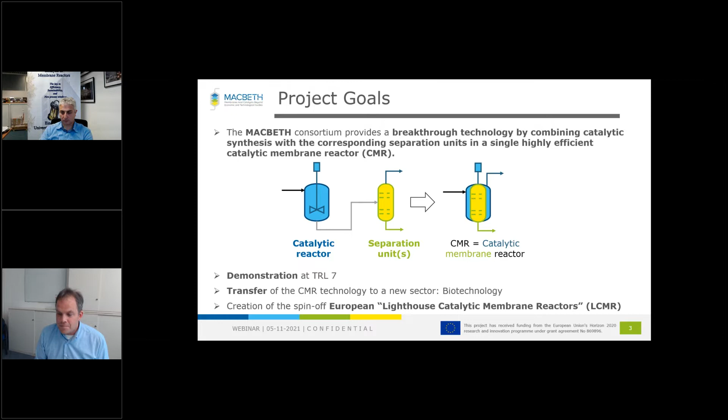If we go to the next slide, you'll see we don't start right from scratch, from the beginning. There's a lot of pre-work already done in predecessor projects.

Four of them you can see here. There's the Romeo project on one side, where large-scale chemical processes were looked at, water gas shift reaction and hydroformylation. Out of that project, we take the hydroformylation as a very promising use case that you will see later on, and to demonstrate the membrane reactor technology in a 2-in-1 reactor.

Bionico was the second European funded project aiming on the hydrogen production and separation in a membrane reactor itself, focusing on the biogas production. So this demonstration case will be elaborated within MACBETH as well, and on top of that, even a second showcase for the hydrogen case.

From the CARENA project, there were promising results in the conversion of light alkanes and CO2 into higher value chemicals that we will look at for the propane dehydrogenation case.

And finally, there's the Cosmos project, a predecessor project aiming on the biocatalytical oil cleavage, where the bases were laid in terms of highly selective enzyme technologies. And the task is really to combine these base findings for the biocatalytical oil cleavages and bring it now into the thinking of the membrane reactor technology. So really a great basis that we could start off.

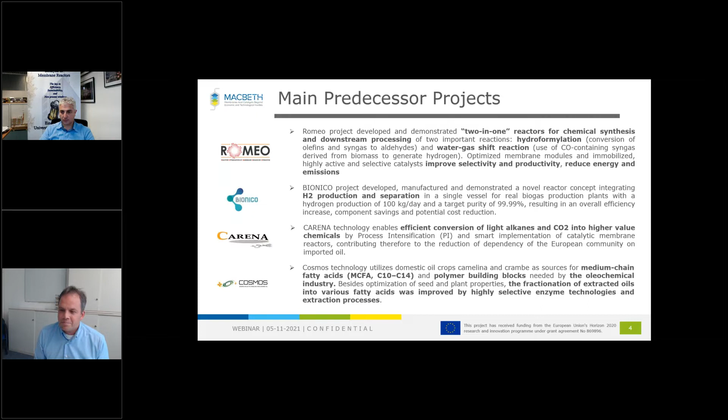Thank you very much, Frank. I'm Fausto Gallucci from Eindhoven University. And as you saw, we have quite a big project, and we want to demonstrate at TRL 7, 4 technologies. Frank already mentioned that for the hydrogen production, we have a second demonstrator. So in total, we have 5 demonstrations at TRL 7.

And how we put and set up the project together is realizing that the different teams have a single point in common, which is the integration of reaction and separation in membrane reactors. And to do that, you have building blocks, which are the supports for catalysts and membranes, the membranes themselves, and the catalyst to be integrated.

So what we do is we start from what we achieved in the different project at TRL 5, what we call building blocks. We scale up the building blocks, we integrate in membrane reactors, and finally we do the demonstration.

And as we also said before, one of the output of this project will be also the creation of lighthouse membrane reactors, where we collectively put together all the knowledge and we offer the knowledge to other partners that want to test membrane reactors, so membranes and reactors for their application. So in this way, we thought that we can accelerate the exploitation of the membrane reactors for other type of reactions.

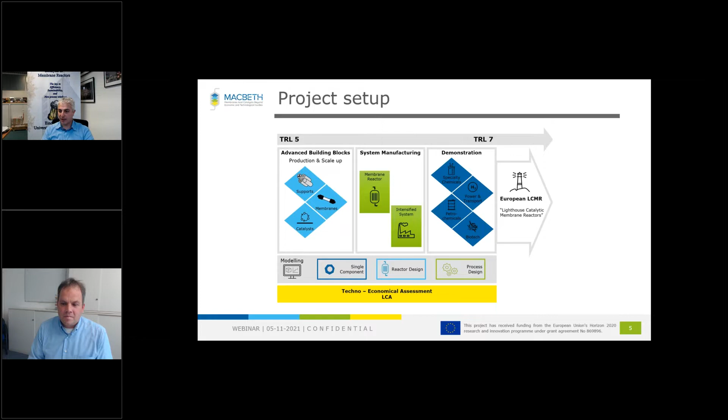Now, the project is quite big. It's 24 partners in 10 countries. And I'm also happy to say that soon will be 25 and next year will be 26 partners. So as an experience in European project, I'm very happy that this is the project where partners start to join the project rather than leaving the project.

And we have from Germany, Italy, Spain, the Netherlands, Belgium, and France, UK, and Turkey as well. So you see that this is quite diverse.

And we have 5 prototypes, and here you see where the prototypes will be tested for TRL 7. We have 4 cases. One is the hydrogen, the hydroformylation, propane dehydrogenation, and the BOC case. And today you will see a presentation, a short presentation of all the cases, 15 minutes per presentation, and then afterwards we have time for discussion.

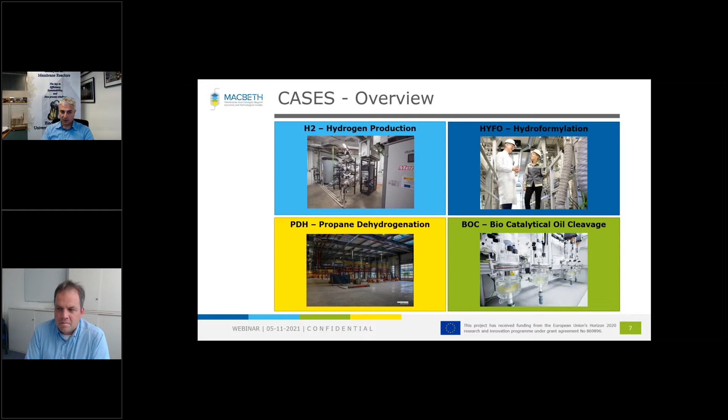And the agenda of today will be basically after this short introduction, we will start with the hydroformylation, and then I will continue with the hydrogen production, and then we go on. And at the end, we have 20 minutes for hopefully your questions.

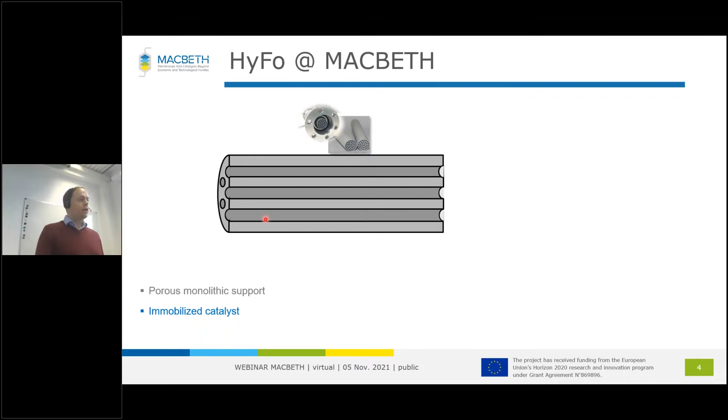What we are doing now is we are changing the system from a homogeneous into a heterogeneous one. To do so, we are using monolith structures to support the catalyst material. And what we're doing additionally, we are wrapping a membrane on the outer wall of the monolith system.

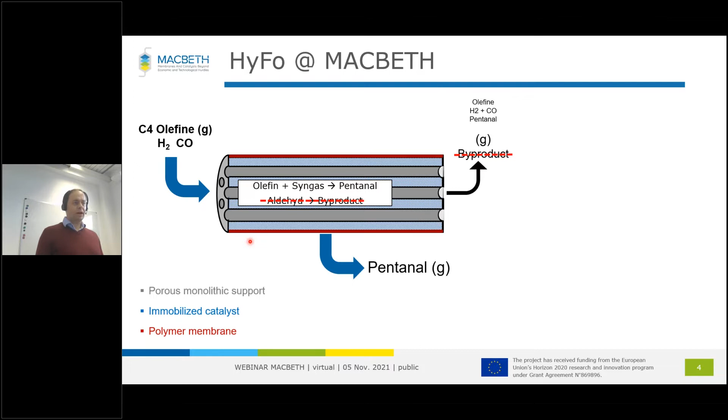We are doing the same chemistry, so we are inserting olefin, hydrogen, and CO into it. We are still converting it to pentanal, but now there's an interplay between the reactor and the membrane. The membrane works as a separation unit, but it affects the reactor, the reaction, and the whole process in a tremendous way, with a highlight in the focus of sustainability.

Because it clearly simplifies your process - by putting two things into one process unit, you have the advantage that you can remove your product just in time, preventing side reactions like the formation of byproducts. With this, you increase the selectivity of the process. On the other hand, in a typical fixed bed reactor, your pentanal will act as a diluent in the bottom part, but by removing it as soon as possible, you can intensify the whole process.

And if you apply this technology, you're clearly saving carbon dioxide emissions. And because you integrate a big part of your downstream in one unit, you increase also the energy efficiency.

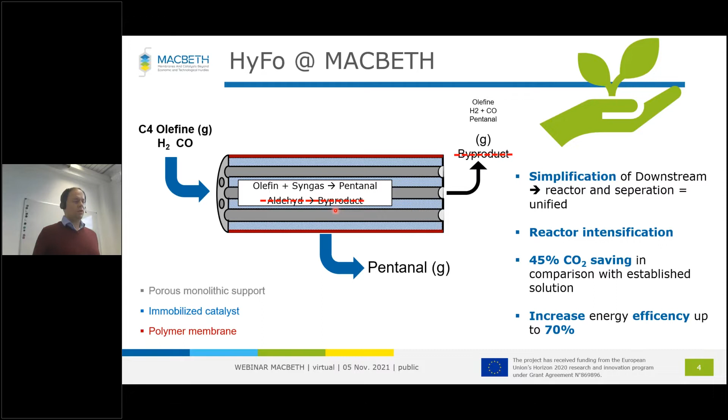So now you have a nice sketch about how it works, but how is it realized? This is sketched here. So here is our monolith, and this monolith is a porous ceramic made of silicon carbide - a really tough material. This material is completely porous with an open pore network, so that all your reactants can be transported into every channel all the time.

And in this channel, you can see here, the pore structure includes another material, an SiO2 layer, which is stored in those pores. But the pores are still open, so that you have again complete transport to the whole system. And finally, at the outside of this monolith, we have a supported skin material, which is there to keep the membrane, which is a polymer, in place.

Because of such large pores, if you would just add a polymer simply to this ceramic, your membrane would not stick as long as required. The skin is just a small layer of additional silicon carbide material, which provides another pore texture, and for this reason your membrane keeps in position.

So now I've shown how the monolith is constructed, but where's the catalyst? How do you do that? For industry application, it obviously requires a very simple system to do so, to be applicable. This is sketched here.

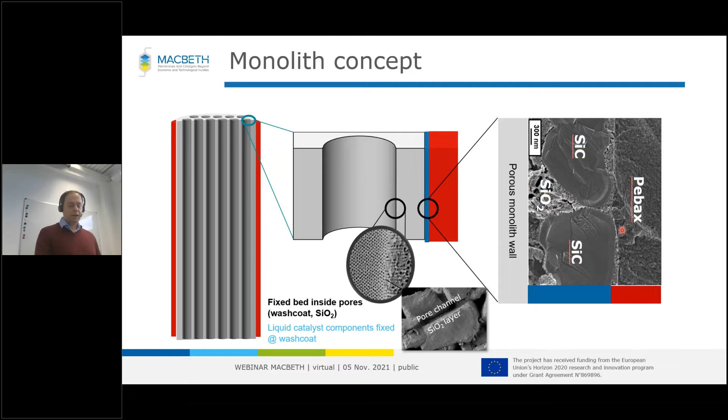So to introduce the catalyst to the reactor, we have a so-called coating procedure. It requires a solvent which can easily evaporate, and in this solvent, you put in your classical materials - the rhodium precursor, the ligand, and the stabilizer. What you can do in parallel is just mount the monolith to the setup, and then you can introduce your coating solution to the reactor, filling everything - this means the monolith inside and the pores.

This happens at ambient pressure and room temperature, so it's not very sophisticated anymore. It's applicable even on a larger scale. After waiting half an hour, you can release your coating solution, and then your monolith is ready to perform. You just have to evaporate your solvent and increase the temperature, and then the system is ready to operate, so you can increase pressure and temperature, feed your reaction feed into the system, and the monolith works.

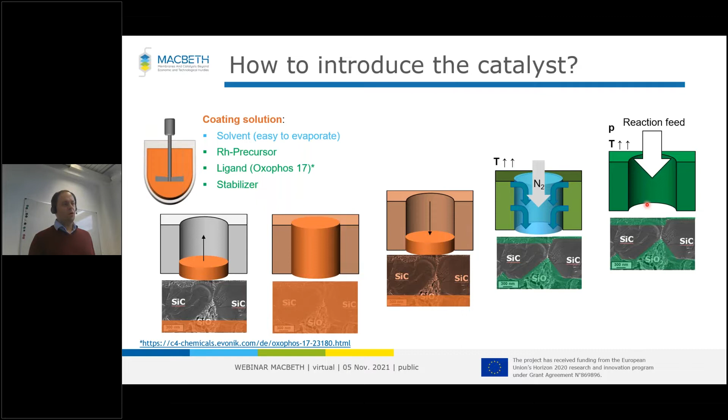To get to this status obviously requires a great team with several experts to improve, optimize, and even develop it. Here is an overview.

LiqTech and CSIC take care of the monolith, the wash coat, and the skin. Hereon provides the membrane and all the experiments on how to put this membrane to the wall so we can mount it on big setups. DTU takes care of the whole coating process and coating optimization strategies. FAU takes care of testing the system, because we have a complex interplay even if it looks very simple. And we as Evonik are doing upscaling experiments, long time experiments, and we are also highly interested in modeling this whole system, because the interplays are still complex, but they work.

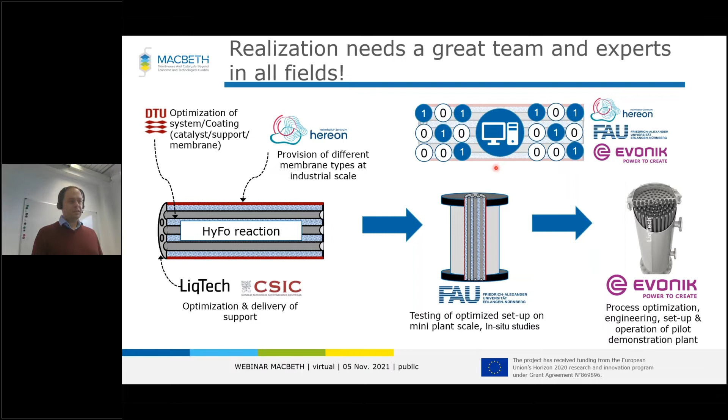So what is the status for today? We are right here on the left-hand side of this picture. We are still using lab setups at a scale where we can operate the system for more than 1,000 hours and beyond. Our next step will be to move into the field to construct a pilot plant, which will have a clearly bigger dimension than we have here in this lab.

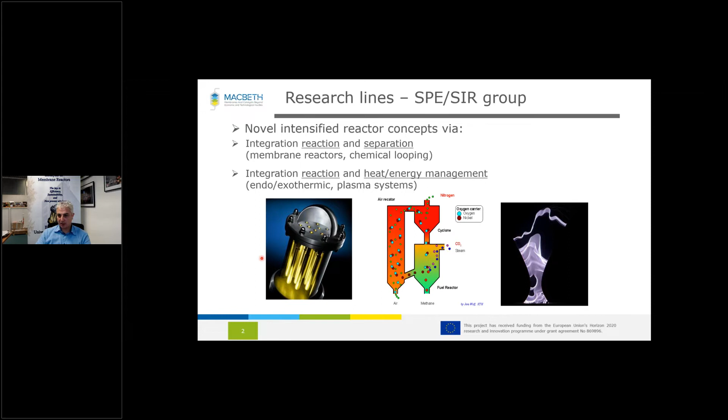For hydrogen, what we mentioned before is that we started from the results of Bionico. Here you see the reason why we use a membrane reactor. If you start from biogas or natural gas, you can produce hydrogen through a number of steps which are all equilibrium reactions producing hydrogen, but they work at different temperatures.

So reforming is high temperature, and then you have lower temperature water gas shift, and finally purification. On the other hand, if you integrate the separation of hydrogen into the reactor, you can basically combine all the steps into a single one, which helps decrease the capex, but you can also decrease the temperature because you shift the equilibrium, and this helps increase efficiency.

In MACBETH, we started from Bionico, where we designed a reactor for biogas conversion, and we want to demonstrate two prototypes for two different technologies: one is autothermal reforming of biogas, the other is steam reforming of natural gas. The reason we want to do two is that they share many common themes.

The catalysts and membranes are shared, but the architecture is a little different. In one case it's more compact but less efficient. In the other case it's a bit more involved because you have recycles, but it's also more efficient. We work with palladium membranes because this way you have much higher selectivity and can get pure hydrogen in one step without cleaning afterwards.

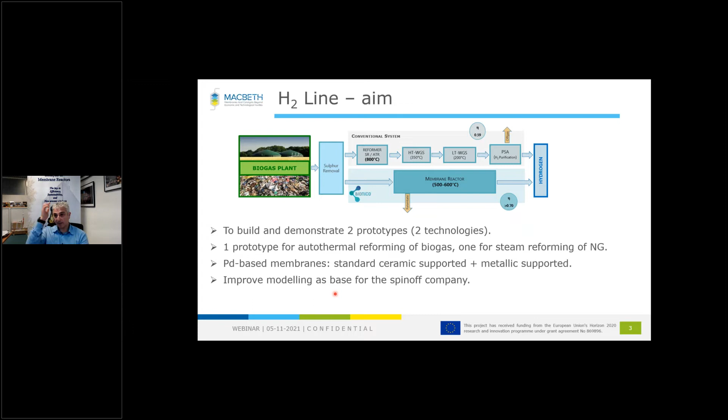We also try to improve the modeling and all the knowledge on membrane reactors to move toward a spin-off company that will be part of MACBETH. As I mentioned, for the different lines we have something in common: the catalyst, the membrane, the support, and the reactors. What does this mean for hydrogen?

For hydrogen, the goal for the catalyst is to optimize the amount of catalyst compared to the amount of hydrogen we want to produce. In the past, till Bionico, we played it safe, just putting enough catalyst to always be at equilibrium. But now that we're closer to commercialization, we have to really optimize the catalyst, especially because in the last 2 years the cost of materials, including the active material for our catalyst, has increased quite a lot. So we have to optimize that.

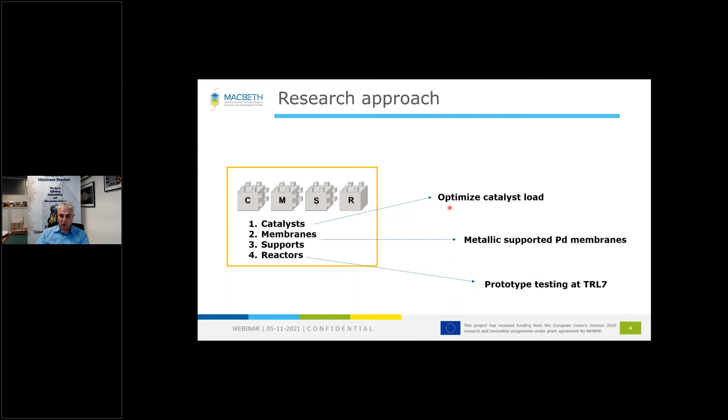For the membranes, what we are working on especially is metallic supported membranes, including the support. The reason is that with metallic supported membranes, the sealing is much cheaper and the selectivity is much higher. On the other hand, the cost of the actual support is too high, so we are working on reducing the cost. And of course, the reactor involves testing the prototypes at TRL 7. I'll show a few results on all of these points.

The first is the catalyst. What we did in Bionico, or till Bionico, is develop a fluidized bed catalyst. We use a fluidized bed because the membranes are very selective with high flux, so to avoid any mass and heat transfer limitation, we work with a fluidized bed. But in Bionico, we just had so much catalyst that there was no problem in conversion. Now what we want to do is really reduce the amount of catalyst to the optimal amount.

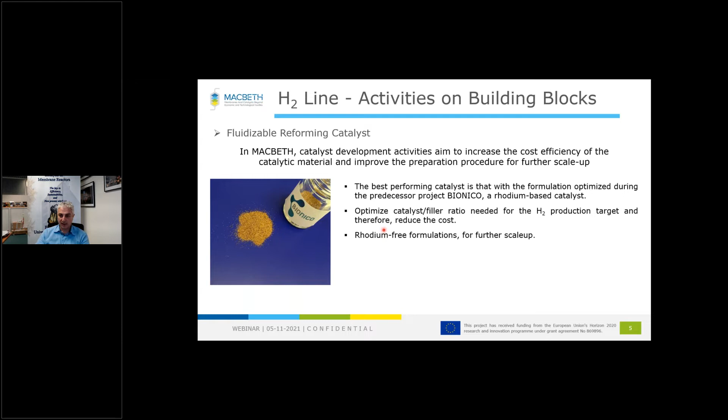I want to show you a few modeling and experimental results. The blue points are the experimental results done by Johnson Matthey, which is producing our catalyst. You see that in principle we can get very good results with our model if we use the right model for the right catalyst.

In the case we use nickel catalyst, which has a much lower productivity as you see here, if we put enough nickel catalyst and enough rhodium catalyst, basically there's no difference. The reactor will produce the amount of hydrogen and will just be limited by the hydrogen that you remove from the reactor itself. But if we reduce the amount of catalyst, you see that with rhodium we can go to 10% or even lower than 10% and still produce the amount of hydrogen we want. While with nickel, at a certain point we start to be limited by kinetics.

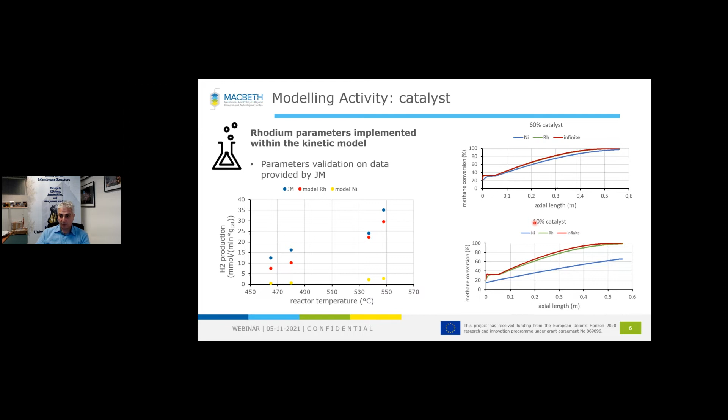Since we're working with rhodium, it makes sense to go very low in the amount of catalyst needed for hydrogen production. We then used this model to map the operation of the reactor as a function of temperature, amount of hydrogen produced, and amount of catalyst. For our catalyst, as soon as we reach around 10%, there's basically no difference in the performance of the reactor at any temperature.

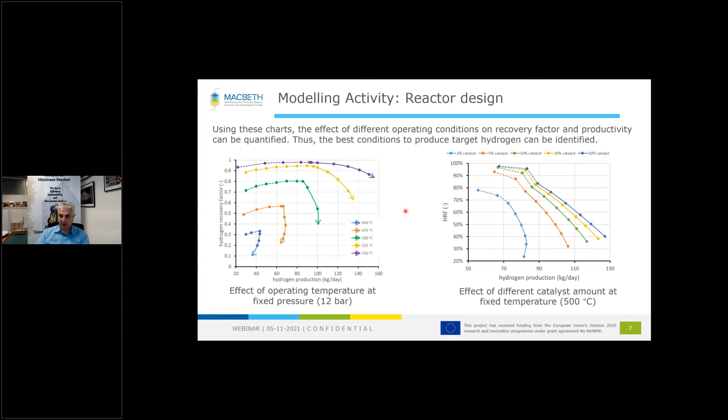Now, for the metallic support, as I said before, we are able to produce metallic supported membranes. There are different people able to produce metallic supported membranes, but if you want to do a large-scale membrane reactor, the cost of the support is too high, especially because there's only one company that produces support with the quality needed for our membrane. So what we do in MACBETH is start from relatively cheap support, actually Hastelloy filters.

You cannot simply put the palladium on top of it. What we do is modify the surface of the support. Then we put a coating of ceramic to avoid any interdiffusion movement of metal, and finally we put the palladium on top of it.

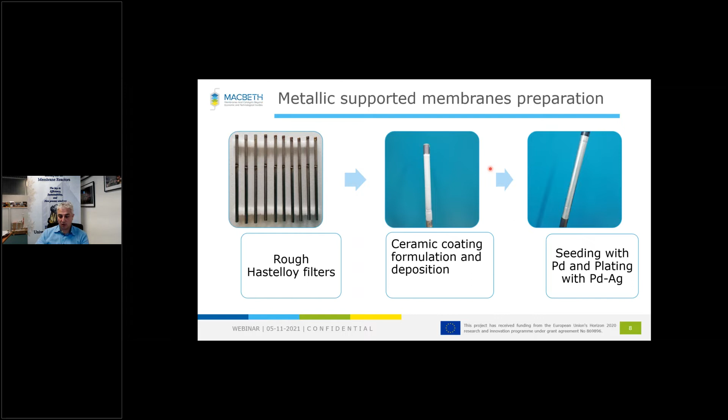I want to show a few tests that we did in the lab. You see that basically you can modify and polish the surface. As a function of time, your surface gets more and more polished, more and more smooth, as you see here. This is the original support, then 3 hours, 6 hours, 9 hours - you get an increasingly smooth surface. On the other hand, you are also covering some of the pores.

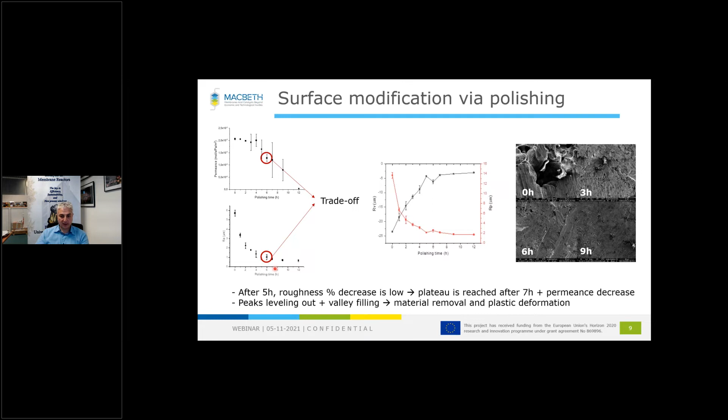The permeation through the support decreases, so we found out there is a trade-off, and this trade-off is around 4 to 6 hours, where you can have the good quality needed to produce the membranes. Here you see a few membranes that we produced - this is a first plating and then a replating, giving relatively good membranes. You see that we are able to do either 4 to 10 micron membranes.

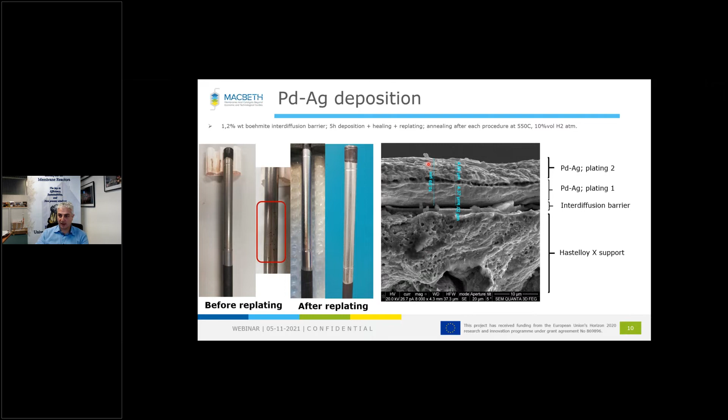You can see also here the interdiffusion barrier. Where we are now is that we know how to modify the support, but the layer is not as good as we need for the reactor. And you see here that there is a little bit of leakage still, and this is because the polished support has still some big pores, and we are now optimizing how to cover these big pores. So at the moment, the ideal selectivity is below 1,000, and for the project we should go above 20,000.

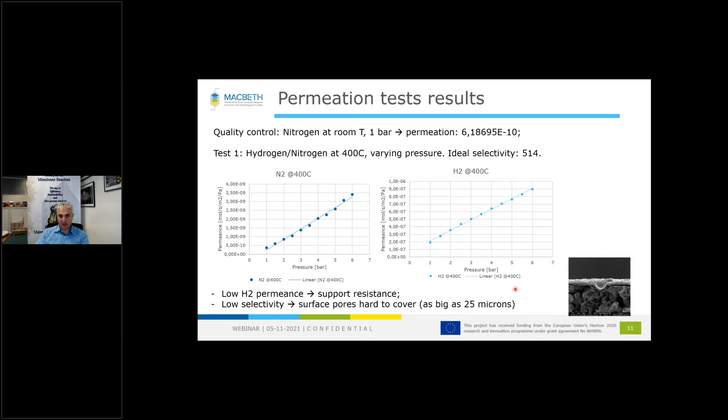The next step is the demonstration. We have two demonstrations, I show here only a picture of one. We went through the design, modeling design, HAZOP, and you see here a scheme during the HAZOP, and here you see the real prototype.

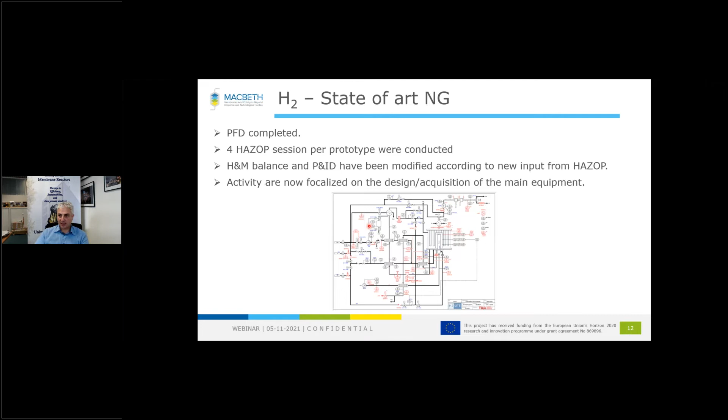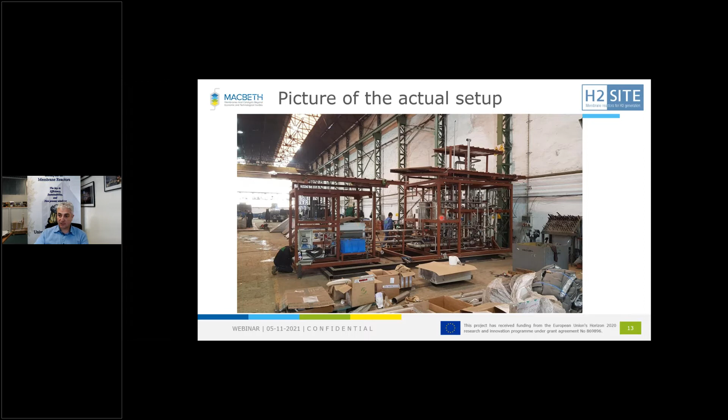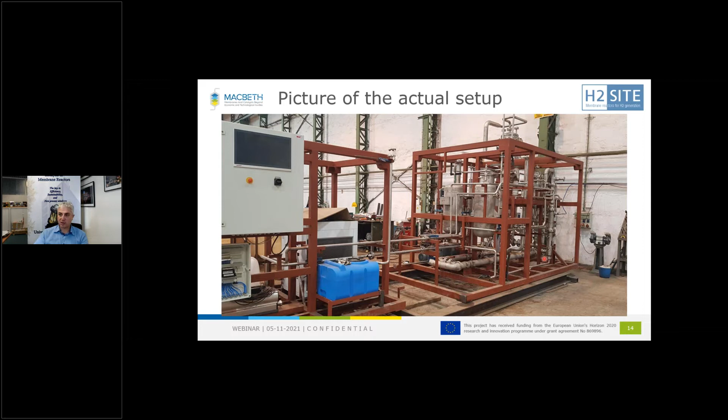For the hydrogen, we are a little bit ahead compared to the other lines. Prototypes already being assembled, you see a lot of parts here, and here another picture of the prototype. This is a 20 cubic meter prototype. It's still quite empty because it's still a research prototype, but it's smaller than a container. This is now being transported for the final connection and the FAT, and then we will be able to test this reactor, hopefully next year.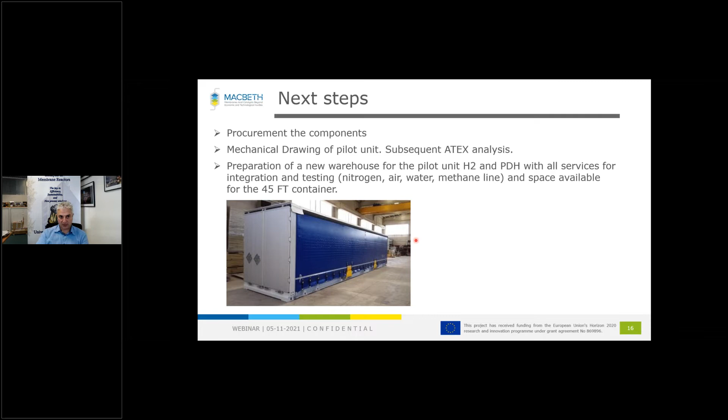To finish, what we are doing now is to further optimize the amount of catalyst, scale up the membrane production until we can produce all the membranes, hopefully next year for the prototype, and finalize the two prototypes. One is almost finalized, the other is a little bit behind, but we are confident that also the second one will be finished by next year.

The main challenge we see at the moment is that the supply of components is not straightforward, because those components are too large for lab scale and too small for larger scale. So we are in between, and it's very complicated to get the right components. But still, we are confident that both prototypes will be finished well in time for the demonstration. Thank you very much, and I will hand over the word again.

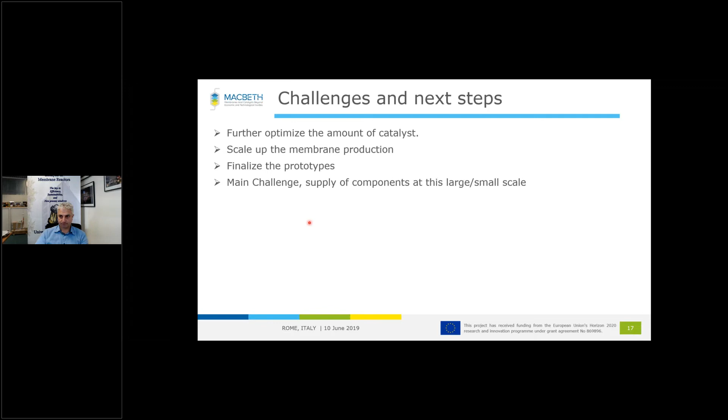Okay, can you see my screen? Yes. Okay, good afternoon to all. Okay, so I'm Vittoria Cosentino from KT, and today I will illustrate the PDH line for the MACBETH project.

In this presentation we will see some information about propylene with a focus on thermodynamic and kinetics aspects. We will then talk about the background of the PDH membrane-based technology, to analyze what led us to the definition of the MACBETH objectives and the new innovative PDH line, and conclude with a brief focus on the status of the activities.

While we are talking about propylene, the propylene market today is very varied, as propylene is the basis of many commonly used products, mostly plastics and adhesives. In the graph you can see a breakdown of the market, where the majority of production is towards polypropylene. Currently, propylene is produced as a byproduct of ethylene, in processes such as steam cracking and fluid catalytic cracking.

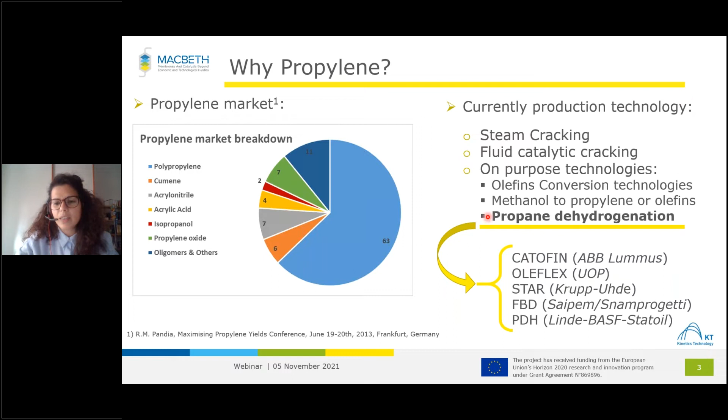But today, on-purpose technologies are becoming more popular, since the demand of propylene is widely increasing, while the demand of ethylene is decreasing. So the main on-purpose technologies are olefin conversion, methanol to propylene or olefin, and propane dehydrogenation. Among the latest commercial technologies are CATOFIN, Oleflex, STAR, FBD, and PDH. All of these technologies are based on propane dehydrogenation.

In blue you can see the reaction, and as you can see, this reaction is strongly endothermic, so it's favored at high temperature, and occurs with an increase in moles, so it's also favored at low pressure. Industrially, the operating conditions are temperature between 560 and 650 degrees C, and pressure up to 5 bar.

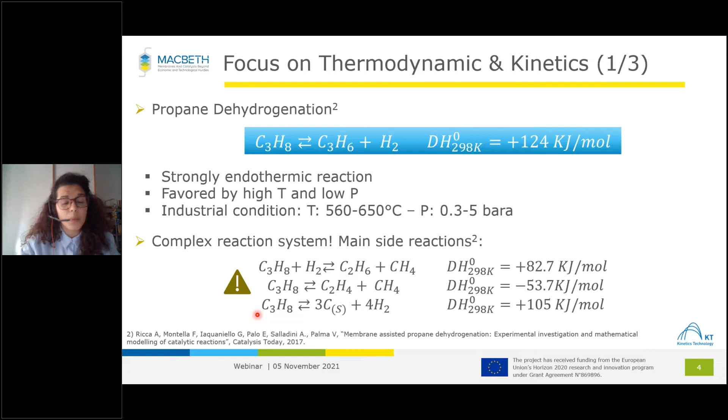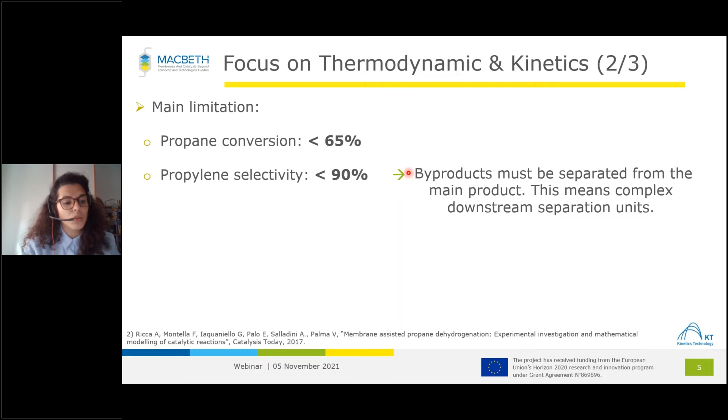The reaction system is very complex; these are the main side reactions which occur in parallel with the dehydrogenation, and propylene is not the most favored product. So we need a catalyst to favor the propane conversion and the propylene selectivity. However, even with a catalyst, the propane conversion is quite low, and the selectivity of propylene doesn't exceed 90% in the most optimistic case. So we have lots of byproducts which should be separated, and the downstream separation unit is very complex.

The main problem is the coke formation, because the coke can deactivate the catalyst sites and lead to different problems during operation of the reactor. The reaction is endothermic, so it's favored at high temperature, but coke is also favored at high temperature.

This means we need to operate at lower temperature, which further reduces the propane conversion, and above all, we need to regenerate the catalyst during operation. So indeed, the commercialized technology has a complex system of reaction-regeneration schemes. So what would be a solution?

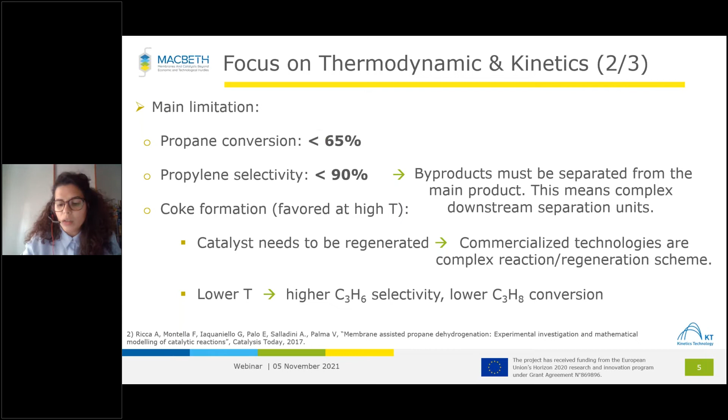A solution could be introducing inside the reactor hydrogen perm-selectivity membranes. Removing the hydrogen allows shifting the chemical equilibrium towards products, thanks to Le Chatelier's principle, enhancing the propylene yield at lower temperature. We also have other advantages: use of low-grade heat rejected by downstream process, reduced catalyst regeneration step, potentially reduced conventional plant capacity, and valorization of the side stream.

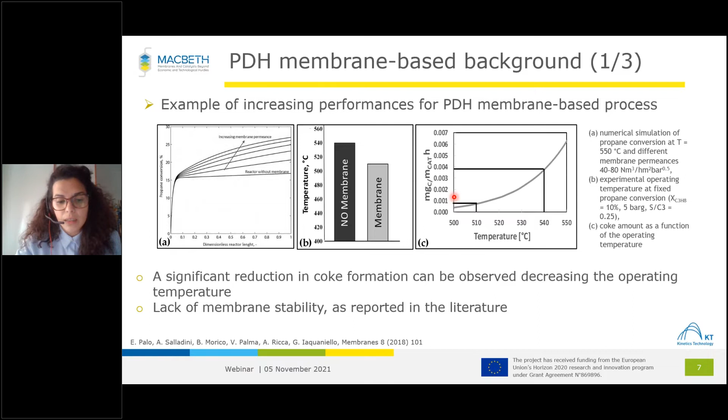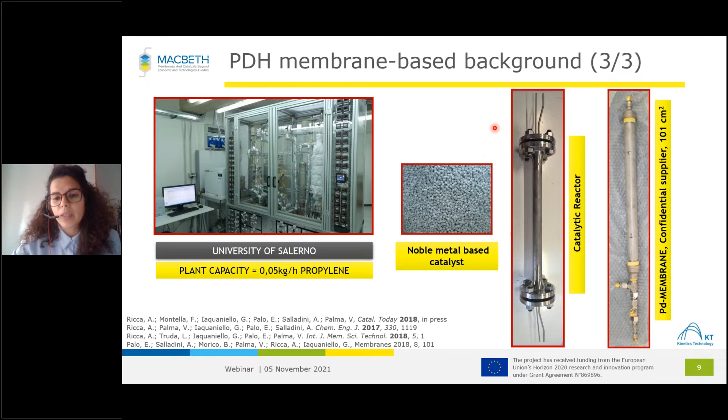In these slides, there are some pictures of the previous PDH membrane-based project: this is the pilot plant, and then we have pictures of the catalytic reactor and the membrane module.

Starting from these previous results, the aim of the MACBETH project is to bring the PDH line to TRL7. The main objectives are to operate the plant at mild operating conditions, below 540 degrees C, in order to reduce coke formation and thereby reduce catalyst deactivation, increase propylene selectivity, and have a stable operation of the demo unit for more than 4,000 hours.

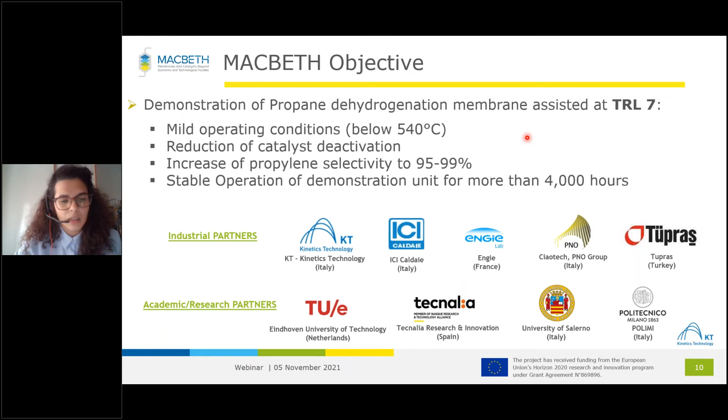The partnership is made up of industrial and academic partners involved in different activities inside the line. The core system of the line is a fixed bed reactor in which we have palladium-based membranes for hydrogen separation, which are double-skin membranes, and a platinum-based catalyst.

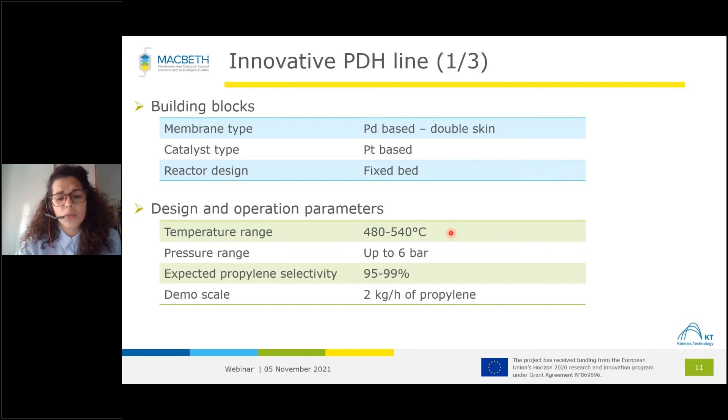The operating conditions are between 480 and 540 degrees C with a pressure up to 6 bar. The expected propylene selectivity is about 95-99%, and the demo unit will have a capacity of 2 kilograms of propylene.

If we look at the overall process, we have a comparison between a simplified Oleflex scheme, one of the benchmark processes, and the MACBETH scheme. What we can see is that the new membrane reactor allows us to consistently reduce the reaction phase, and so also reduce the reactor area.

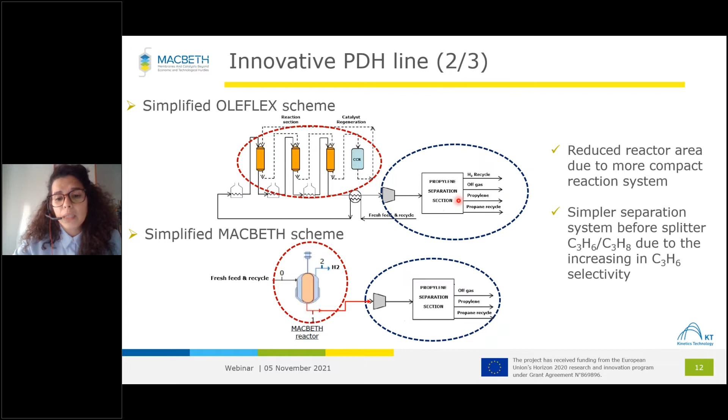Furthermore, since we have a high propylene selectivity, we can also simplify the downstream unit. We don't need a PSA because we recover the hydrogen from the membrane, and moreover we can simplify the separation unit before the propylene-propane splitter.

In this way, we estimate a reduction in capex of 15%, and a reduction in opex of 16%.

Moreover, the mitigation of the operating temperature, decreasing in coke formation, and so the need to have the decoking cycle less frequently, and the reduction of the separation section lead to a decrease in greenhouse emissions of 20%. Reducing fuel consumption, increasing hydrogen productivity, and reducing the duty of the separation unit lead to an increase of 20% in resource and energy efficiency of the line.

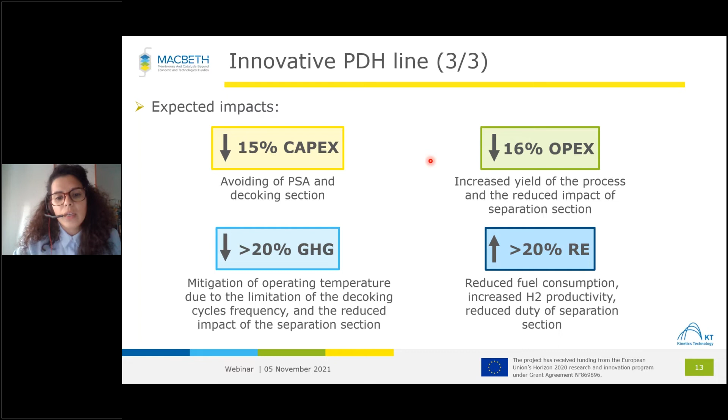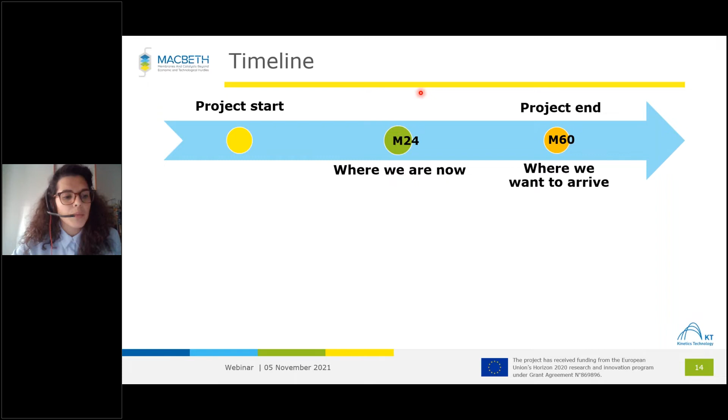So basically, these are the objectives set for the PDH line. At timing level, we are now at month 24 of the project. The design of the prototype unit is still in progress, and in parallel the optimization of the catalyst and the new membranes is in progress, and we have also started the study of an industrial scheme for this new PDH reactor.

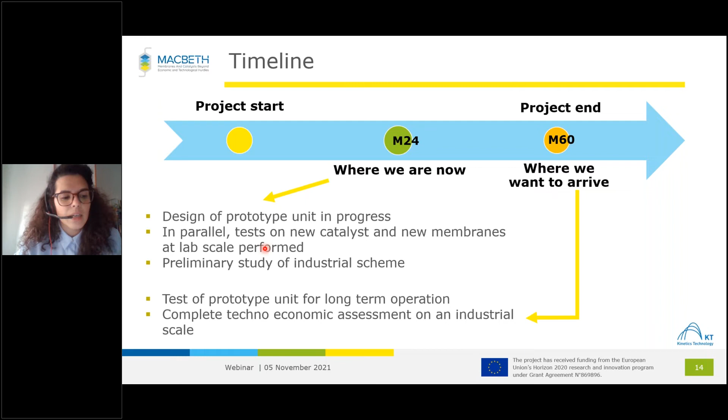At the end of the project, what we want is to have concluded the long-term operation, and we are confident that the results will be positive, and to have a techno-economic assessment of the industrial scale system. So for now, that's all.

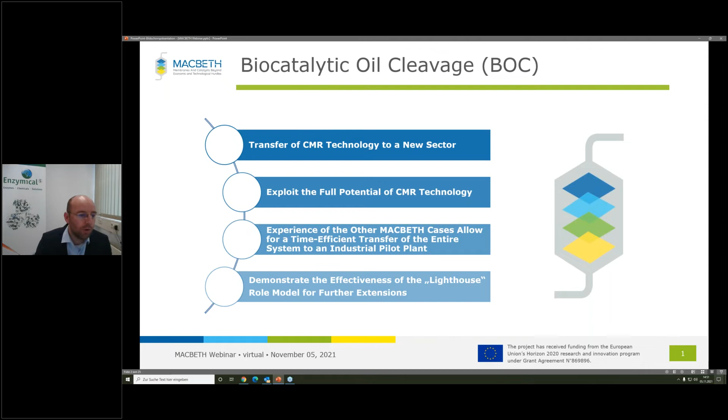We, from the BOC case, started at the lowest technical readiness level of all the four cases. This means we have to develop the whole process a lot faster to achieve the ambitious goals of this project. Therefore, we will take advantage of the experience and knowledge of all the other partners within the MACBETH consortium to make progress really fast. So in a way, we are the role model for the foreseen spin-off company Lighthouse.

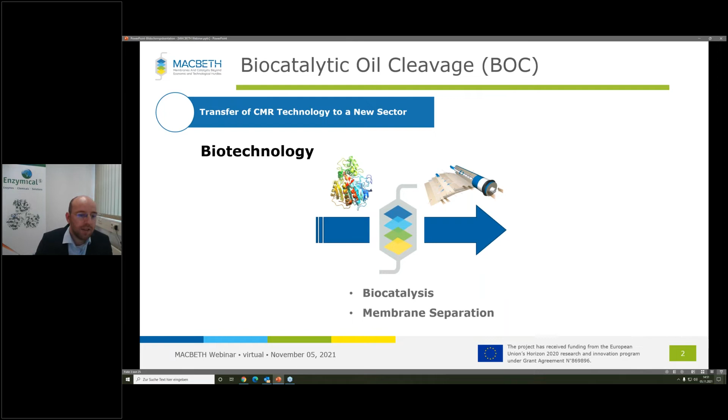We joined the MACBETH project with the idea of utilizing both enzymes and membranes in a biocatalytic oil cleavage process to enrich valuable omega-3 fatty acids in fish oil.

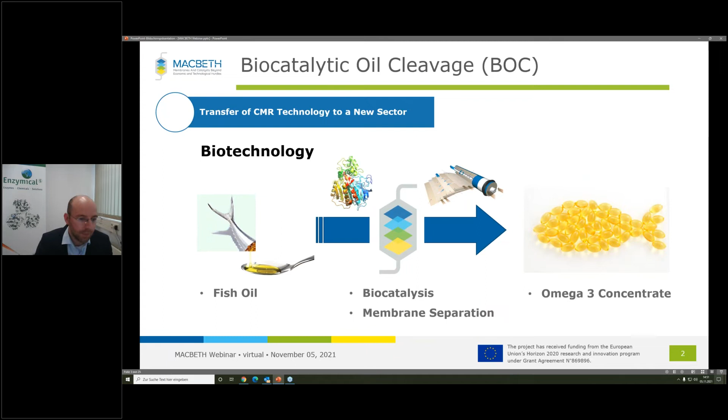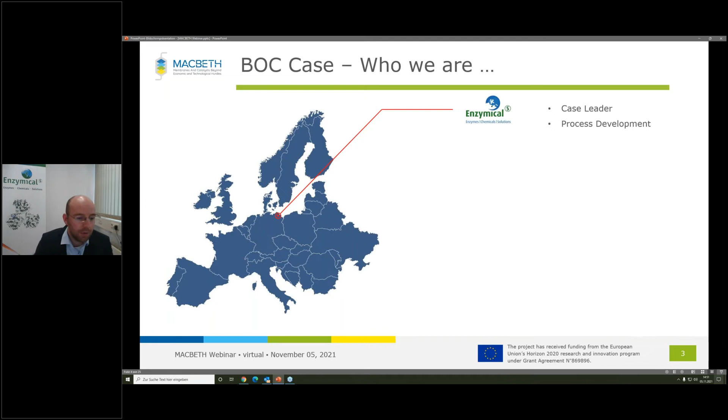But before I explain the whole process to you in more detail, let me first introduce you to all the partners involved in the BOC case. First of all, we from Enzymicals are the case leaders of the BOC case and mainly responsible for the process development of the catalytic reaction.

Here we closely work together with ChiralVision from the Netherlands, who are our experts for enzyme immobilization. For all the membrane-related tasks, we have the Vito Institute from Belgium in our team, and Microinnova from Austria are our experts for bringing the process from small batch trials to a continuous flow process. Also, the engineering activities and the construction of the lab and pilot plants are done by Microinnova.

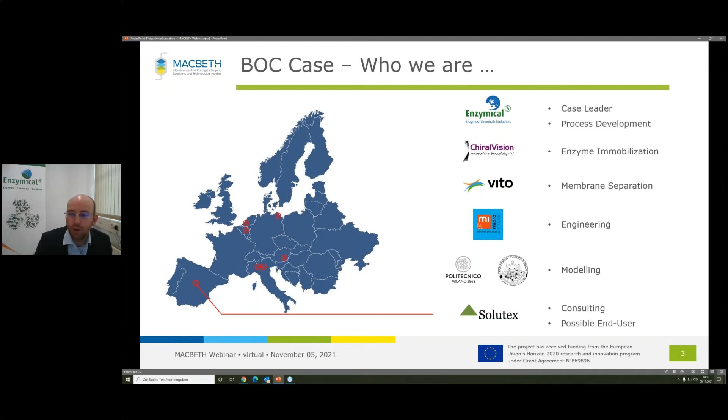Then we have Polimi and the University of Brescia from Italy, who are responsible for all the modeling activities in our case. And last but not least, there is Solutex from Spain, which completes our team. Solutex is well known in the omega-3 fatty acid market and can therefore be a potential end user for the technology that we will develop. Also, Solutex is responsible for sourcing the fish oil and acts as a consultant in our case.

So the motivation of our project is to enrich omega-3 fatty acids in fish oil, namely EPA and DHA, which are both polyunsaturated fatty acids. EPA benefits the cardiovascular system of the human body, while DHA plays a crucial role in the neurological function of the brain. Unfortunately, the human body itself cannot efficiently produce those omega-3 fatty acids. Therefore, it is necessary to obtain adequate amounts through nutrition, for example, eating fish or dietary supplements.

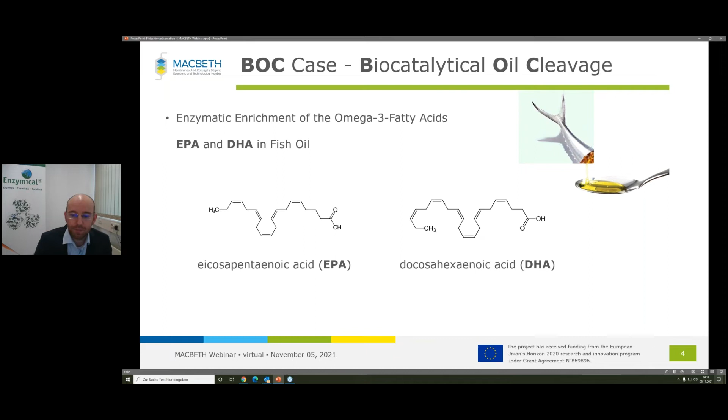By nature, fish oil is already rich in EPA and DHA, but we want to increase its content even further. Therefore, we will take advantage of the selectivity of an enzyme. Enzymes are biocatalysts which bring different affinities towards their respective substrates. In our case, we want the enzyme to selectively cleave off every other fatty acid, except for the fatty acids of interest, EPA and DHA, and those fatty acids shall remain bound on the glycerol backbone.

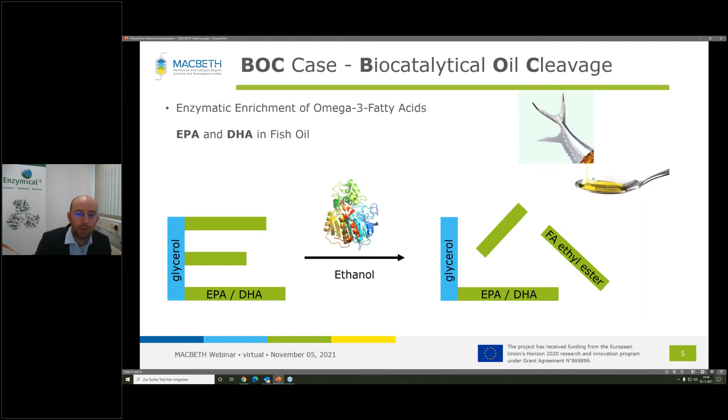So here I want to show you how our process works in more detail. Fish oil consists of triglycerides with a wide range of different fatty acids. Our target fatty acids, EPA and DHA, belong to the longer chain fatty acids. So we are treating the fish oil with an enzyme which is more selective to shorter and medium chain fatty acids, since these shorter fatty acids better fit the catalytic active site of the enzyme. When we add just the right amount of ethanol, we end up with a complex mixture of mainly mono and diglycerides, as well as fatty acid ethyl esters due to transesterification reactions. Due to the selectivity of the enzyme, most of the target fatty acids will remain on the glycerol backbone and will be enriched in the fish oil.

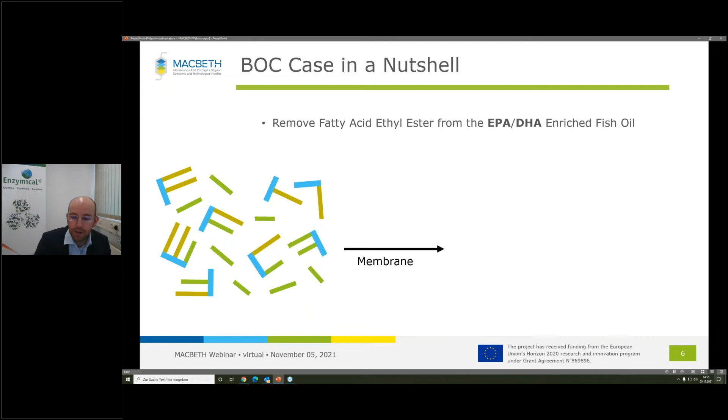Once we let the reaction run to a certain degree of conversion, the mixture is then passed over a membrane. The task of the membrane is to separate the fatty acid ethyl esters from the EPA and DHA enriched fish oil. With this process, we want to increase the EPA and DHA content in fish oil from approximately 30% in the starting material to 50% or even higher in the final product.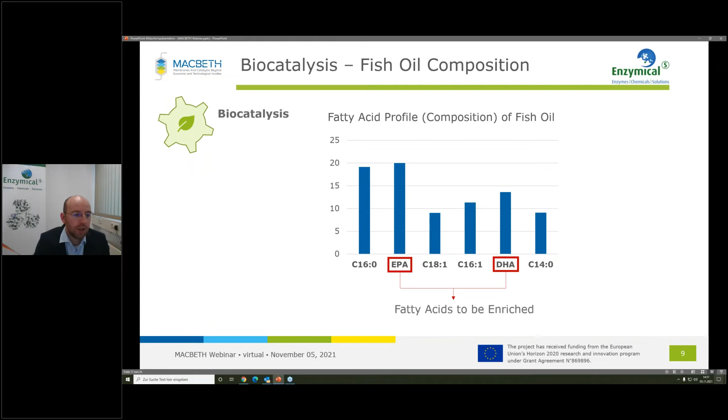Now, what do I mean by selectivity? If we have a look at the fatty acid composition of fish oil, there are a lot of different fatty acids with different chain length ranging from C14 to C22, as well as saturated and unsaturated fatty acids. As I already told you, EPA and DHA belong to the polyunsaturated and very long chain fatty acids.